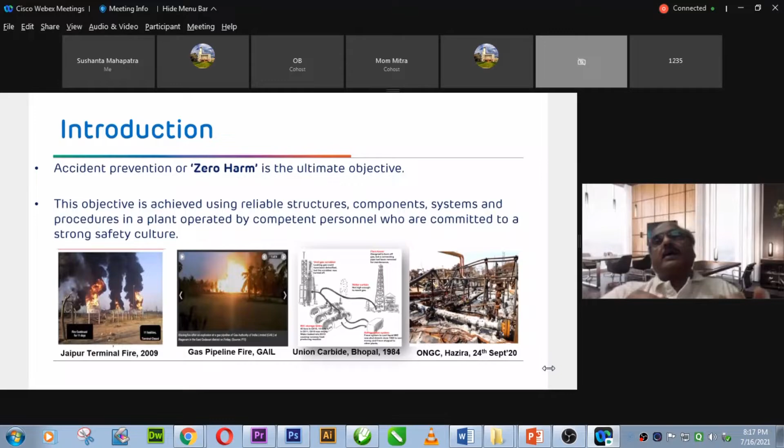Many of these, their sustainability process requires identification and monitoring of critical safety performance indicators, or operational indicators, because this helps management know the current status of operational integrity, and also prevent catastrophic failure and loss of control. Ultimately, the idea is how do we achieve zero harm, or avoid any major loss of control. There are many enablers, but fundamentally you need to have a reliable structure, components, competent people, processes, systems, which are run by competent persons.

There are numerous industry examples which have shown that if these performance indicators fail to be recognized, fail to be understood, and fail to be acted upon, it can lead to catastrophic disaster. The examples are numerous - the Jaipur terminal fire, the gas pipeline fire for Gas Authority of India Limited in 2014 in Andhra Pradesh, where 22 people got killed. Even everybody knows about Bhopal. In fact, very recently, I know about this ONGC Hazira gas plant, where suddenly in the morning at 3 o'clock on 24th September, there was a huge blast and fire. Fortunately, nobody got killed.

But if you look into the details of the failed mechanism, or how it came out, they started coming out with fire and explosions. So these are something which teaches us and the industries that the moment you fail to recognize and take necessary action onto those deviations, it is going to not only kill the people, it is going to derail the entire plant. It is on the survival of the industry how they understand those performance indicators and what kind of seriousness they have on taking action.

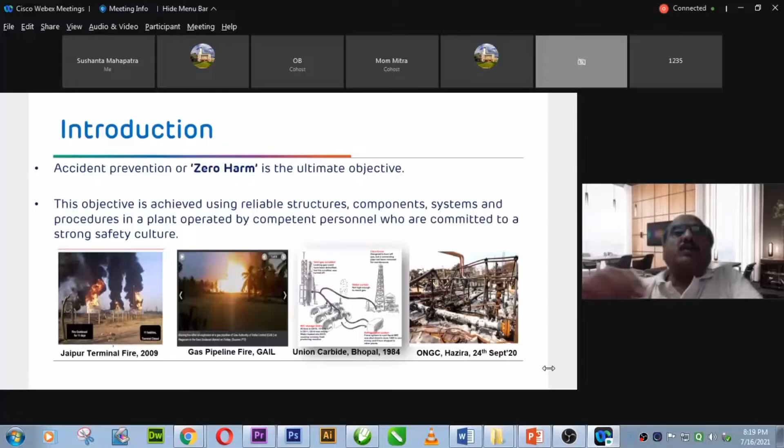When we talk about process industry, whether it is continuous process or batch processing, those processes have the kind of hazardous chemicals or materials getting handled. This is applicable for both.

I'll tell you, in the organization where I'm working, we have many batch processes. But the kind of performance indicators we have fixed, and the way it is monitored and acted upon, the kind of automation we have done, it does not matter whether this process is continuous or batch. The kind of seriousness is all the time the same. In fact, those in batching processes are more exposed, because you do not know what has happened in between when the second batch or third batch is coming up, what kind of conformity in the raw materials and process parameters are there. So I see more danger in terms of batching process industries.

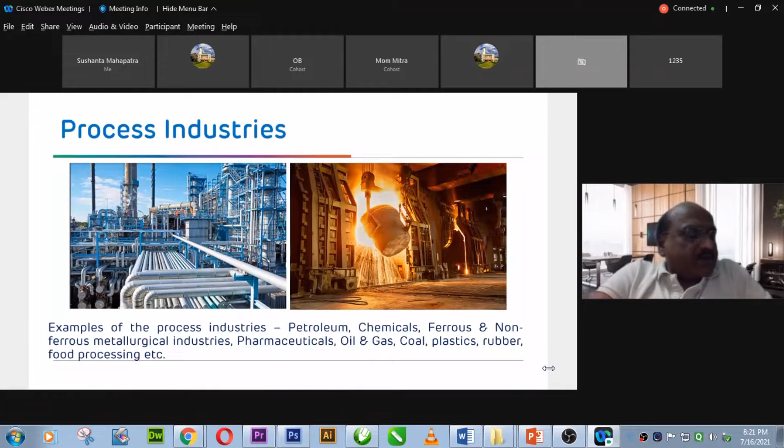There are a lot of examples, like petroleum, chemical, ferrous, non-ferrous. Every industry has its own issues, its own way of monitoring. But the idea is how do you really look into those parameters. That is the topic of discussion today. And then we go back and see. Particularly, I will tell you how I depict the entire process.

If you look into this particular box, all the industry will have three systems. The first is the primary system. If you look into the primary system, generally these are the systems which are operated by or controlled by the operator. And the primary system will have measured input and measured output.

In between, you have raw material, technology, equipment, and all, and the output is the value-added product, whatever the process intends to take out. In between, you have assets. So how are the assets designed? How are the assets managed? These are actually not the responsibility of the primary system guy, the operators. So the primary system looks into how the secondary system provides that infrastructure and the maintenance practices.

So it will have, as you see in the diagram, a process control system, alarms and interlocks, safety instrumented system, physical and community safety procedures, the people involved in those, their competencies, and the auxiliary output can be the accident, loss of control, loss of containment, quality defects, health issues, pollution, or adverse impact on the community.

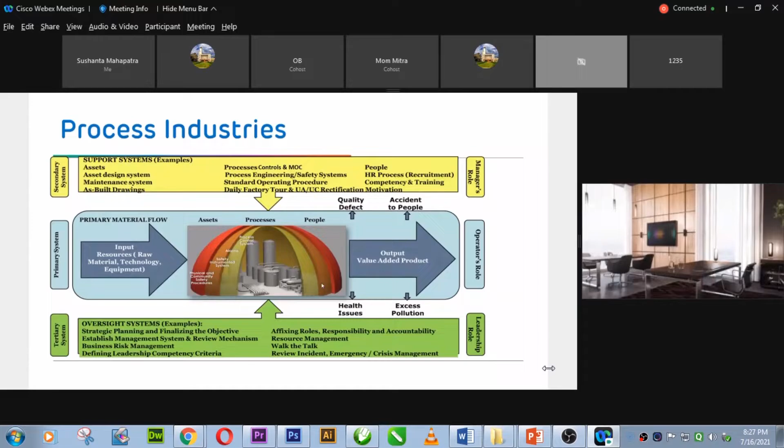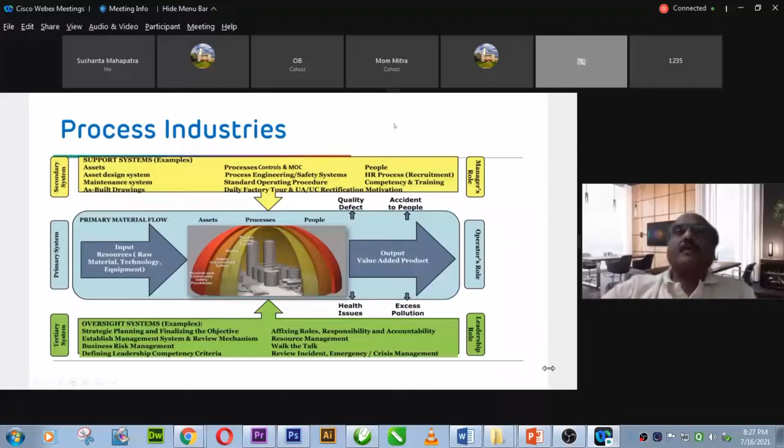It is more about the sustainability of the businesses and processes. So when we talk in terms of process industries, I see there are 6 dimensions of safety in process industries: safety management systems, safety instrumented systems, aging plants, overfill protections and containment systems, competencies, and emergency planning.

Failure of compliance to any of these dimensions results in very high consequences, sometimes catastrophic, impacting human lives, environment, property, and communities. These dimensions are translated into safety performance indicators for identifying early warnings of process incidents. I'm going to describe each one of these dimensions separately.

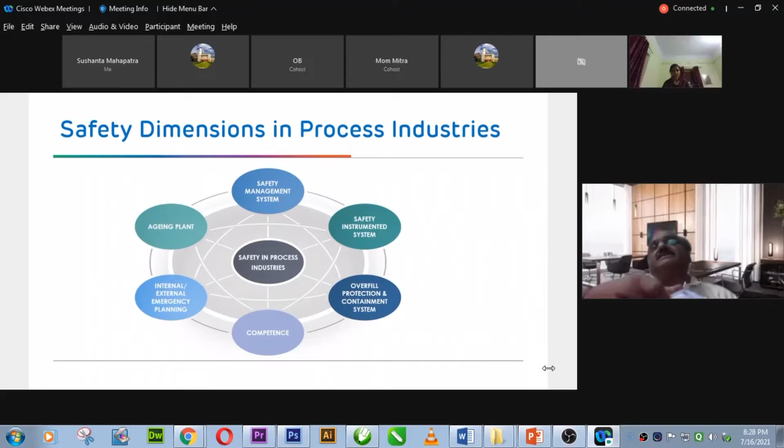For example, when you look into aging plants, there are industries that have not modified themselves, and have not corrected their plant, machinery, and technology to meet current requirements, and they are in trouble. If you know, Tata Steel was established in 1907, and I don't think there is even a single plant, except Blast Furnace A, which is continuing from then.

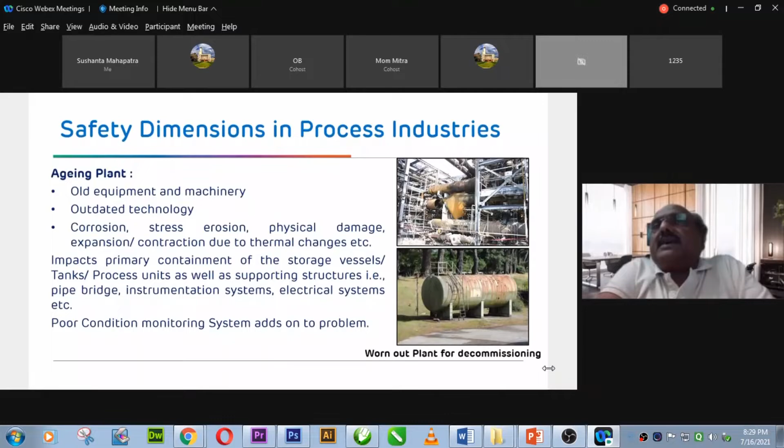So at every plant, they know the life of those plants, and they replace them. They have continuous planning for modernizing those plants. So those organizations which have aging plants need to look into whether, because with old equipment, machinery, and outdated technology, you have a bigger risk.

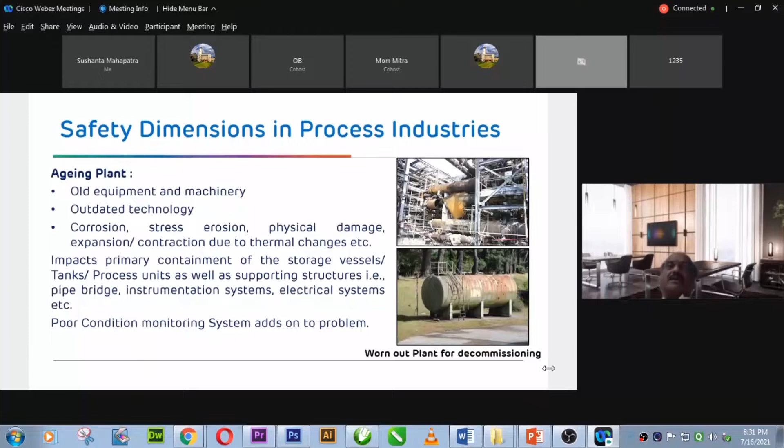So how are organizations taking those considerations in putting processes better in operational excellence, while also ensuring that safety, occupational related health, and the community are taken care of? Many times, even with aging plants, management is eager to continue. How are condition monitors happening across? So this is one of the important dimensions of how management looks into aging's critical parameters and what their planning is for working on those.

Second is about safety management system. I think everybody knows about the requirement of safety management systems. For me, management of change is one of the important parameters which many times people do not understand. And I think there are many incidents in industries which have always focused on the necessity of integrity of management of change.

In fact, initially when I was talking about the Surat ONGC Hazira plant explosion, that was one of the failures of management of change, because when they put the O-ring in one of the flow meters, it was a locally made O-ring and they thought it will work, but it failed, and that was a huge exposure which caused those issues.

I have experienced another incident in one of my organizations when there was a chlorine pipeline problem. They asked the contractor to change the pipeline, and I think it was 1st of October 2015. The 2nd of October was a holiday, so everybody was in a hurry to finish and hand over the plant to the operator. In that hurry, they took out the pipe and also changed the O-ring.

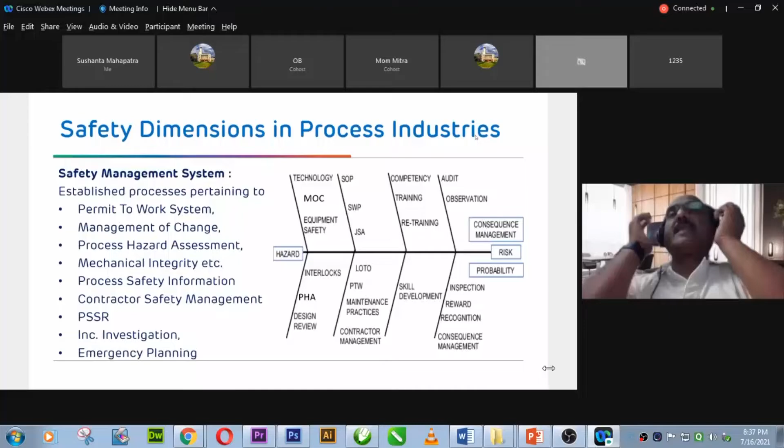A lot of messages are coming saying the audio is unclear, so we are feeling some disturbance. Is it possible to use headphones? Let me try to solve the problem. When I wasn't using a headphone, people used to complain; now that I've started using one, is my voice clear? Yes sir, your voice is clear now, very clear. Let me check if it's possible - is it okay? Looks okay, go on, better sir, better. You don't have a mic on your headphone? So it has a mic there. Hopefully this is better now.

So I was talking about those parameters under the safety management systems. Contractor safety is another part of the entire process, along with PSSR. These are very common, important dimensions in the process industries.

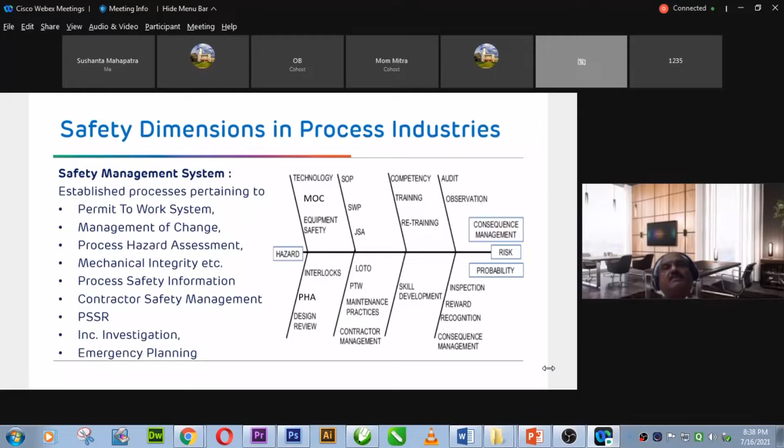I'm moving to the next part, which is emergency planning. Particularly in the process industries, this topic is very important - how do we develop an internal emergency plan covering all potential emergencies within the site, how do we simulate those emergency scenarios and ensure their effectiveness through models, and how do we update and validate the emergency plans?

There are many good examples where organizations were successful in managing emergencies within their own area and resources. However, when we talk about external emergency planning, how does the organization develop plans with neighboring industries and local authorities, covering all potential emergencies within the area, and simulate those to ensure their effectiveness is checked through the model?

If you look into the details of industrial scenarios, there are many examples. Bhopal was one where people were unaware of what would happen if something leaked from the plant. There are many ammonia leakages in industries, and recently we had the LG Polymers gas leak where styrene leaked. Nobody actually knew what could go wrong if something escaped. So it is very important how industries make the surrounding community knowledgeable and aware of what can go wrong and what their access would be if something goes wrong.

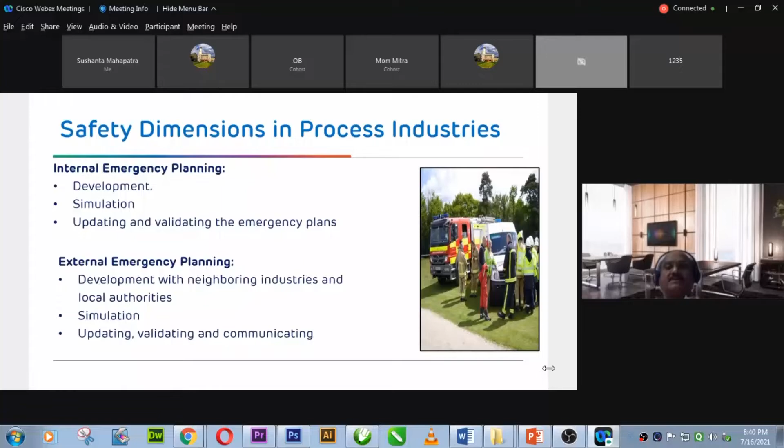This is another very critical part of the safety dimension in process industries, which as an organization we need to look into.

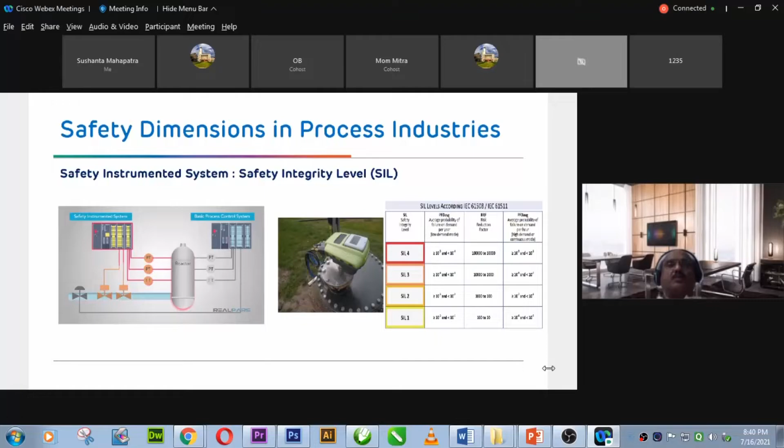The safety instrumented system is very critical internally in terms of reliability of the entire instrumentation systems. Safety instrumentation systems are used to monitor the condition of values and parameters of the process plant within operational limits. It's also about how effective those interlocks are, depending upon the risk involved. The management has built in safety integrity level instrumentation, because SIL 1 is the cheapest and SIL 4 is the most precise kind of system in place.

How serious is management about the kind of money involved in putting in the SIL level? I have personally seen that organizations highly oriented towards the risk involved in their processes, and how it could take away the entire operational part, or how important it is to ensure sustainability of the processes, put money into it. But how, as engineers, are these identified as critical process risks? People don't want to spend extra money on this unless they understand the consequences and how it's going to impact the entire operations.

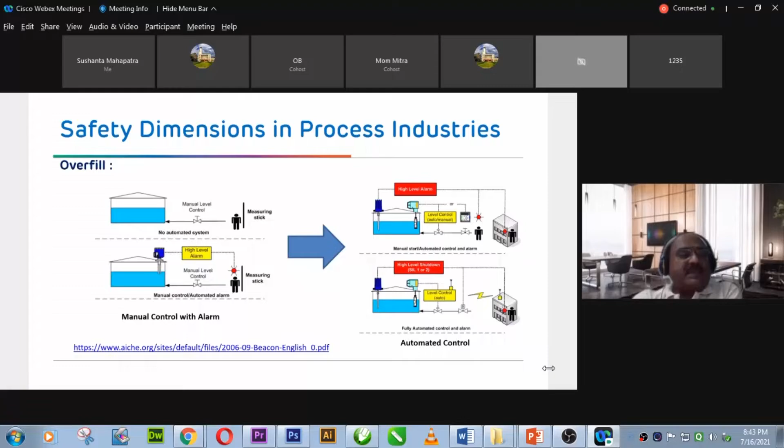This is another important dimension in the process industry: how overfill is critically monitored. The most common process safety events are linked to overfill, which has a very high potential for fire, explosions, and environmental release, and these are very common, with a lot of deviations. In fact, in Texas, and Indian Oil, there are many examples in India also, where overfill has initiated process deviations, followed by an ignition source, and then the entire thing has gone up.

So when we talk about overfill, there are different mechanisms. How do we, as management, provide automation control for that? For example, here there was a manual level controller - people were supposed to go check what the level is, come back, and then close the valve. Then they started with some manual and some automation control.

Looking back, many industries are going for automated control so that it's not dependent on people. However, what kind of redundancy are we providing in these systems, so that even if one sensor fails, other systems are able to take care of that? This is one part the organization has to work upon.

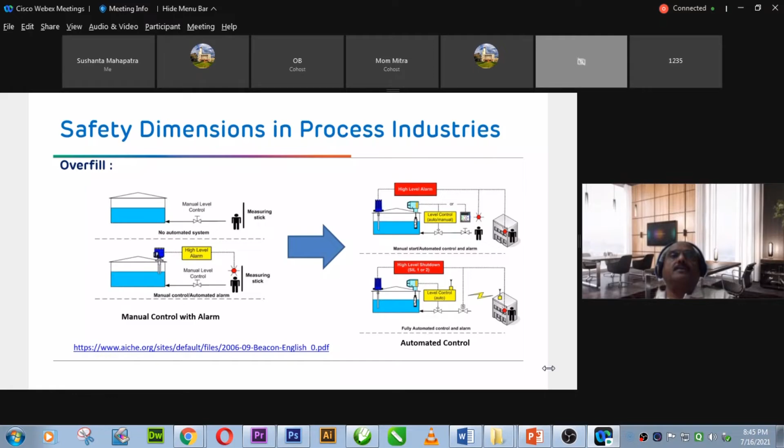The next topic is about the containment system. Loss of containment is another reason for many process industry incidents. Generally, when we have a bund, it would catch any loss of containment from primary containment, say steel tanks, with concrete jackets surrounding them. Many times, if these are not meeting requirements or not capable enough to contain those cases, during emergencies it goes beyond and can impact the society and surroundings.

There are already regulatory provisions stating it should be 110% of the capacity of the largest tank, or 25% of the total capacity of all tanks within the bund. But particularly in my experience, bunds are only made to show the statutory authority, but most of the time bunds don't have the capability to hold the entire loss of containment of the particular chemicals or materials.

If you go back into the industry, there are statutory requirements for tertiary containment lagoons. Nowadays the legal requirements are also there to ensure you have tertiary containment lagoons available so that it does not go into public places. At the same time, those tertiary containments should have impermeable membranes so that it does not penetrate into the ground.

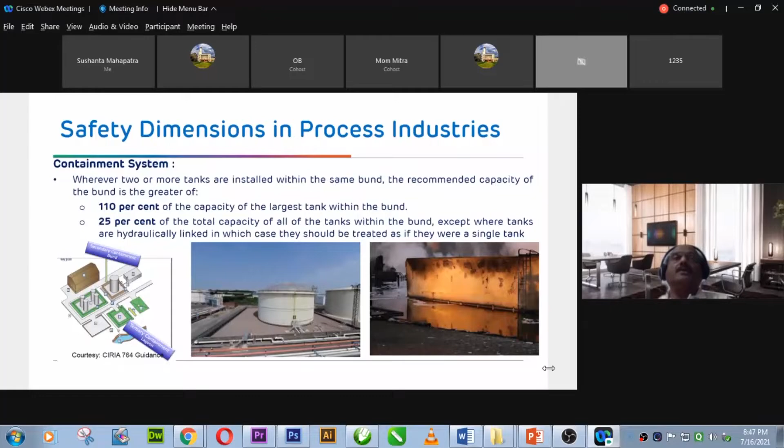The other important factor, as I said initially, is how you have your competency driven process in place so that people have the knowledge and the ability to convert that knowledge into practice. We have worked upon different levels of competency depending upon the hierarchy of the organization.

When we talk about chemicals and other processes, we have many batch processes in place. So we have put competency assessment in the functional area of competencies, defined as level 1, level 2, level 3. In each of those, we have defined the level of understanding required regarding chemical reactions, compatibility of chemicals, the material safety data sheet of the hazardous chemical, the process equipment, what deviations mean for the processes in place, and how they would react to those deviations if they are able to identify them.

I think one good example on this process equipment deviation is the Bhopal tragedy. All of you know about the Bhopal tragedy, what happened and how it happened. But I remember the video from the Chemical Safety Board, when it started, and the chief supervisor was monitoring the pressure into those MIC tanks.

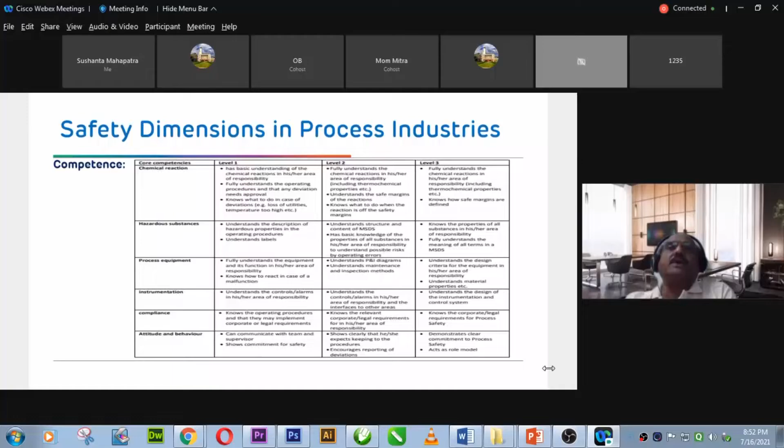Similarly, about instrumentation - their understanding at different levels, compliance, knowing the operating procedures, what are the critical parameters on which they have to take action when it is going beyond the highest or lower than the lowest. Similarly, people's attitude and behavior regarding those deviations. This is one of the important parameters of the safety dimension in process industries.

Now I'm going to talk about the actual measurement process.

About this active monitoring or reactive monitoring, we say leading indicator, lagging indicator. Both the monitoring systems provide you the structured manner for risk control, the barriers, layers of protection within the whole systems. In tandem, or separately, they act as system guardians, providing dual assurance to confirm that the risk control system is operating as intended.

Or providing a warning that problems have started to develop. Generally, when we talk about active monitoring and reactive monitoring, or leading and lagging indicators, one example is the PRV or PSV. Completion of testing of a PSV, the pressure relief valve, can be said to be a leading indicator. And the number of times the PRV failed to lift the set pressure during testing can be a lagging indicator in process safety terms.

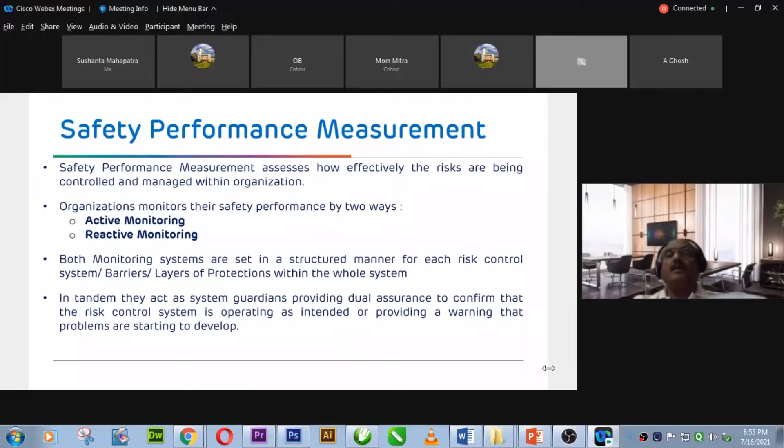So both of these are having their own significance. The lagging indicators are based on incidents and their losses, retrospective and reactive metrics. The leading indicators are based on the performance of key processes, layers of protection, operating discipline. This is forward-looking, proactive metrics, and helps you prevent things from becoming lagging indicators. It must be linked to the safety dimensions and identified barriers, layers of protection for prevention and mitigation of incidents.

If you look into the barriers or layers of protection, we can have physical system barriers, instrumented systems, management systems, and can be linked to plant design and age, as we discussed. Staff competency, we have also discussed about that. Operational procedures - whether it is adequate, whether all the necessary parameters have been described in it, whether people have been trained on any changes, permit to work, MOC, instrumentation and alarms, plant change control, inspection and maintenance. These are some of the critical parts of processes linked to those layers of protection.

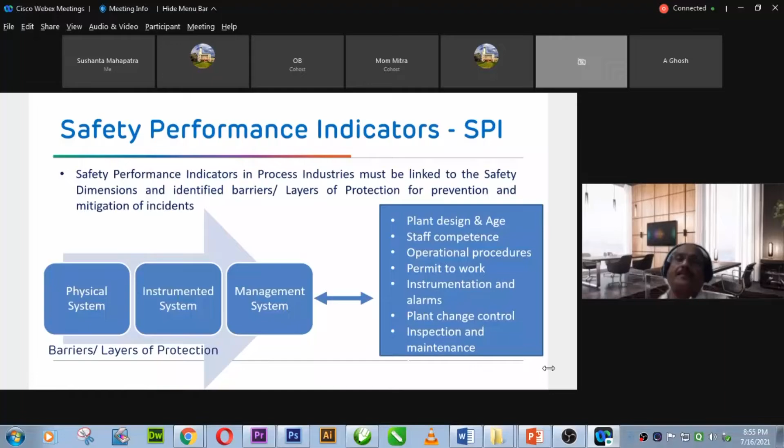We talk about how leading and lagging indicators provide dual assurance. If you see the reactive monitoring, these are the consequence indicators, but they're linked to the risk control system, or RCS, of barriers or layers of protection. So the entire efficiency is how we work upon the leading indicators or active indicators, which provide the important actions to be taken on those deviations necessary to deliver the desired safety outcomes.

So how do we act upon the advanced findings on those leading indicators and try to prevent them from also becoming reactive parameters of the processes. However, continuous monitoring of both the reactive as well as proactive monitoring systems helps provide dual assurance that the system is working as desired on the particular risk control systems.

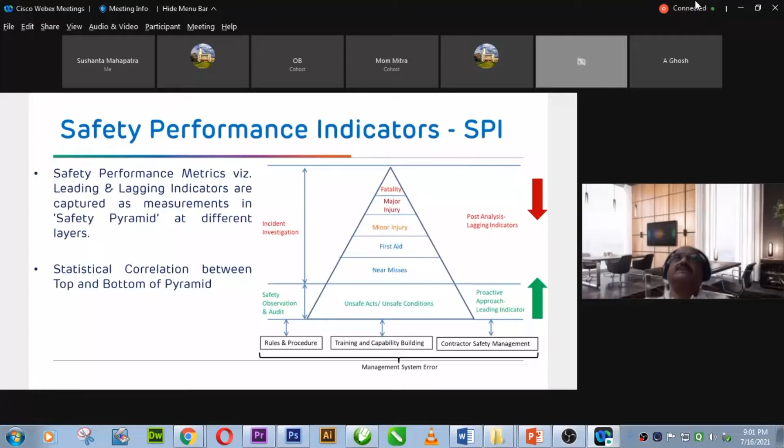Because nowadays contractors play a very important role in managing the process, because almost 30%, 40% of frontline operations are done by contractors. So how does the organization manage contractor efficiency in terms of their resources, knowledge, competency, and skill? But when you go back to the process side of things, it's slightly different from the behavioral part, and how are those process safety incidents recorded?

The process safety events are recorded. Near misses are recorded. Critical process deviations are recorded, monitored, and acted upon. So if we work on those process incidents, process deviations, day-to-day, shift-wise, and take a good trend to understand what deviations are happening. And many times, if an organization or even management does not try to establish that kind of seriousness in the normal way of process deviation, it becomes a huge problem later on. So people's sensitivity towards day-to-day process deviations must be taken care of. That is one of the important process indicators, how serious people are about those deviations.

I will tell you about one of my site visits. I went to one of the control rooms and was talking to the person who was controlling things there with two, three other people. I was looking into the control panel. There were some, as you know, when you go to a control room, there are green lights, red lights, yellow lights, white lights. So I asked the guy, this corner, three lights are continuously yellow, what does it mean? And the guy said, boss, I don't know, because since I joined five years ago, this has been continuous yellow.

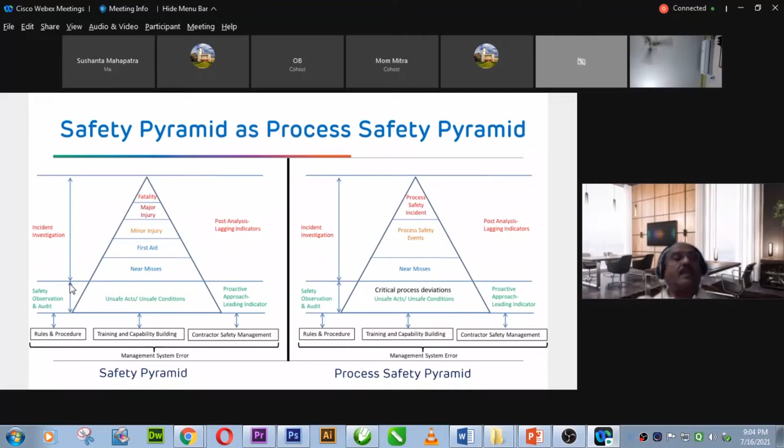The other important thing is to understand what those layers of protection are, how effective they are, whether those layer of protection barriers are independent and clearly identified and referred to, to understand how those layers of protection are helping the entire process. So when we look into the barriers, they must be independent.

When you talk about closed systems, they are designed to physically cope up with the operating pressure. When you talk about instrumented systems, they are designed to control the pressure within the design limit, or the temperature, or the flow. Additional physical systems are installed to relieve the pressure if the logical system fails to control it. Inspection and maintenance systems are designed to ensure integrity of the physical systems. Management systems like procedure, competency, performance management, and audits are designed to ensure that all of the other systems work effectively. So how do the layers of protection do their work independently?

This is another very important performance indicator for the industries.

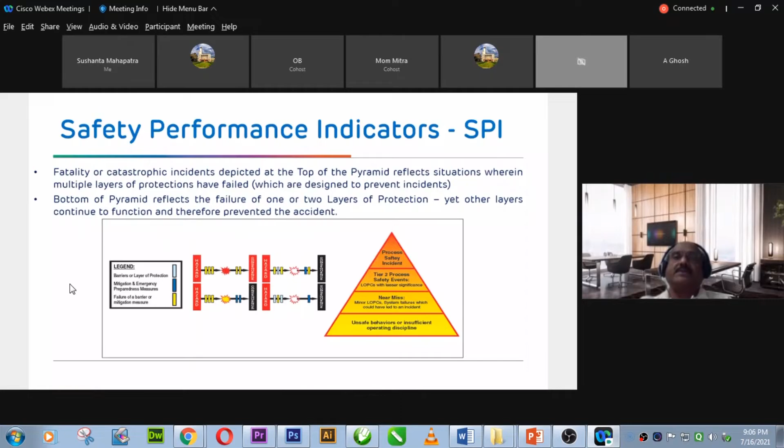If you look into the details of the potential incidents and how they are correlated or related, critical performance indicators are there. Like loss of containment, fire explosion, environmental release, process units, and all. These are permits related to these incidents that can be linked to those PTW variations.

How do we work upon those, like field audit, document audit, permit verifications, non-compliance, critical activity decategorizations on the permit to work. Similarly, audit will help you to understand how we can help prevent those kinds of incidents.

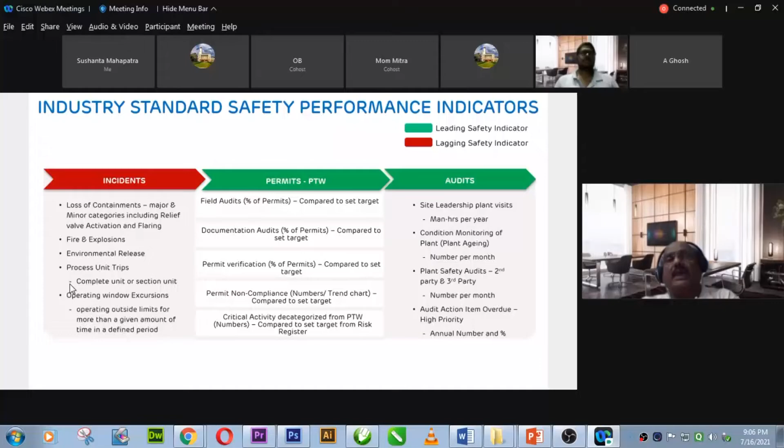Similarly, emergency response will help you if we do the inspections and do those models. It will help to get ready for those emergency responses. When we talk about...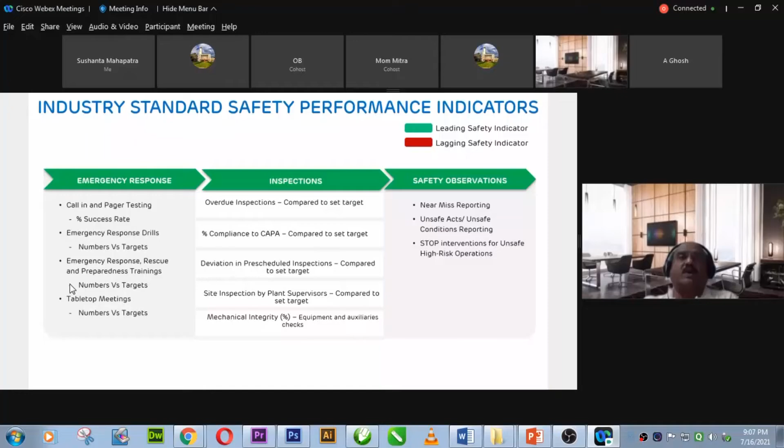Process safety management, how the MOC is working upon, like number of open or overdue MOCs, number of incidents due to failure of MOC, number of MOCs raised by non-trained employees, compliance to the PHA. So those process safety parameters help you link to those lagging parameters. And safety instrumented system talks about overdue test failure, bypassing or overriding safety instrumented systems.

Similarly, another set of parameters relates to routine operations, what are the daily shift checks, the start-up and shutdown checks, housekeeping audits, industrial hygiene. These are critical safety performance indicators which help you control effectively on process and operational efficiency.

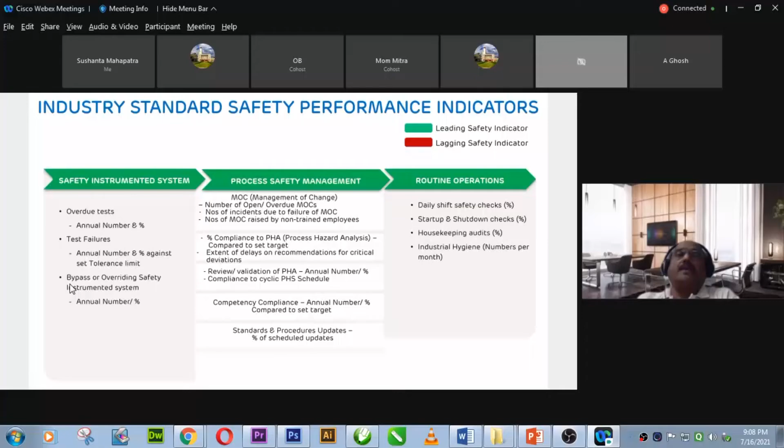I'll just present you a very simple case study on the process industries. This is related to one of our businesses because we are India's largest port. This company operates a contract bulk storage business handling at one of the port sites, comprising two separate tank farms, each containing 80 bulk liquid tanks.

Chemicals are imported by ship and discharged at a jetty on a canal. Shore side offloading is undertaken by company personnel, and the chemical is then transferred to the site via fixed pipelines running across a private field and a small public road. Both sides have road tanker loading gantries. Ship to shore transfer is undertaken via articulated gantries with flexible hose connections and screw fitting couplings.

Road tanker filling is fixed on the overhead gantries with some bottom loading using flexible lines. Clients' contract drivers fill their own vehicles. Both sides are in operation 24 hours a day. All lines between the source and the installations are cleaned and pigged regularly, and bulk tanks often must be emptied and cleaned to allow for a change of product.

Because these are all very dynamic in nature - today one vessel has come with hydrochloric acid, tomorrow there may be nitric acid, then it can be LPG or LNG. Anything can happen any day because we're not very sure what vessel will come tomorrow or which vessel will reach at what time.

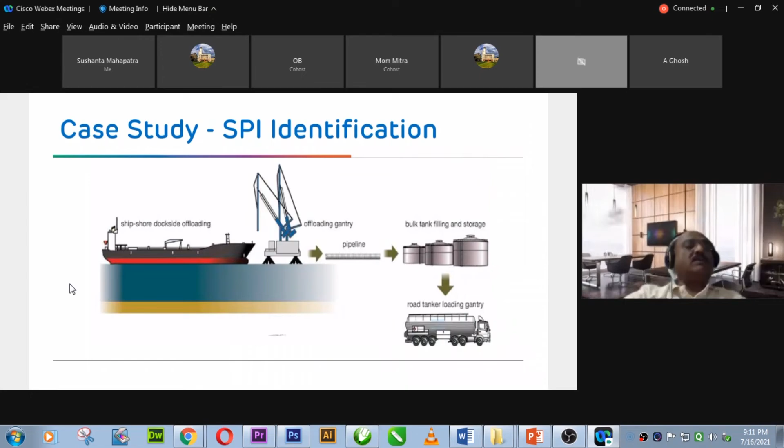Now on this particular process, how do we set the SPI? I described the step process in slide number 20. I'll just focus on steps 2, 3, and 4, the clear steps, and we will discuss it.

In step 2, decide the scope of the measurement system, the storage tank will be looking into loss of liquid into bund, loss of liquid outside bund, fire and explosion, fire in bund, fire outside bund. When we look into the dock line and chemical transfer to storage tank: loss of liquid from the dock line, loss of liquid from the fixed pipeline, coupling, valve, and flanges, fire at the dock side, and leak in the transfer pipeline, fire in bund, fire outside bund.

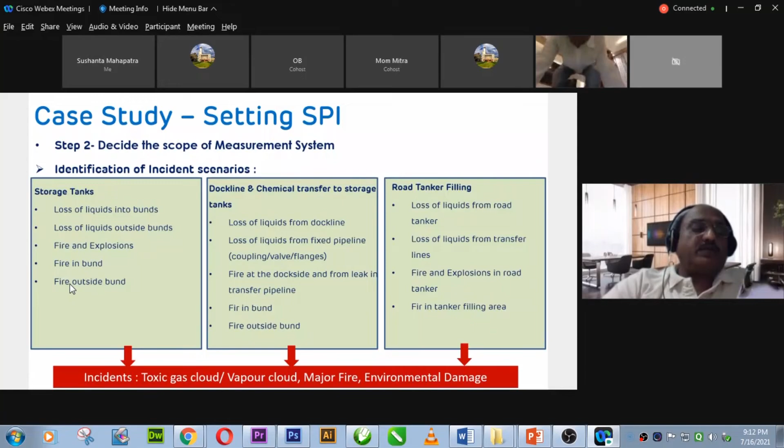When we talk about the road tanker filling: loss of liquid from the road tanker, loss of liquid from the transfer line, fire and explosion in the road tanker, fire in the tanker filling area.

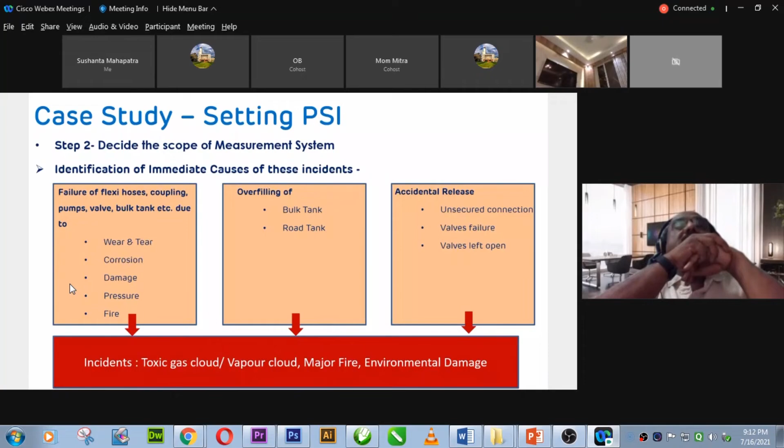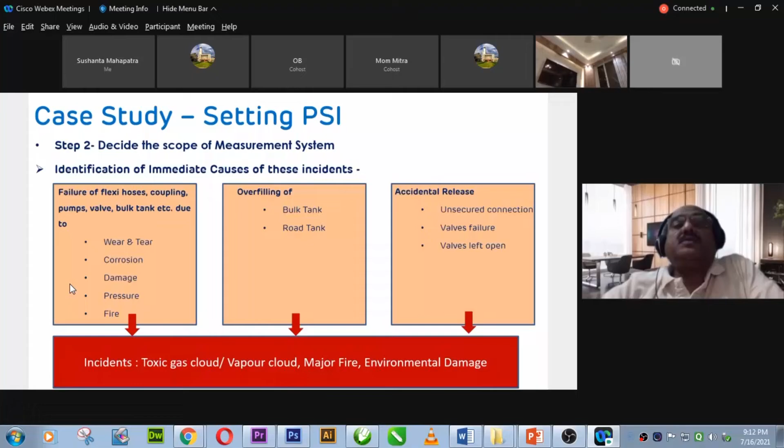Similarly, the immediate cause of these incidents can be failure of flexi hoses, couplings, pumps, valves, tankage, which can be because of wear and tear, corrosion, damage, pressure, fire, overfilling of bulk tank and road tank, accidental release because of unsecured connections, valve failure, or valve left open. So these are the deviations or parameters which can lead to the bottom of the barrel.

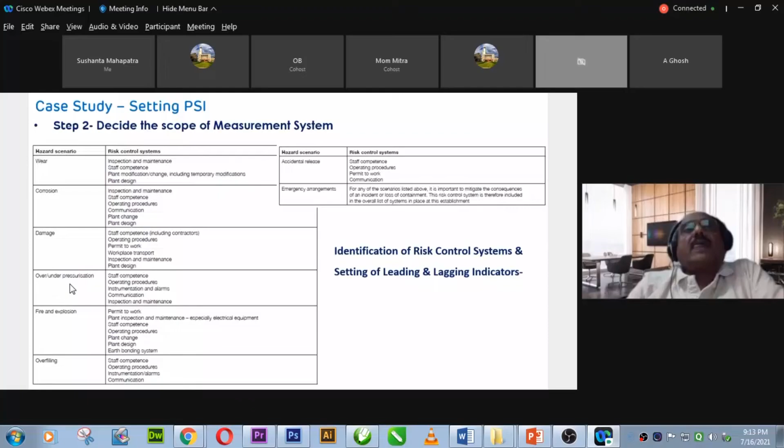Decide the scope of the measurement system, we decide on things like wear - what are the risk control systems, corrosion - what are the risk control systems, damage - what are the risk control systems, over/under pressurization, fire and explosion, overfilling, accidental release, emergency arrangements. So we work on deciding the scope of the measurement, as we talked about the 6-step process, and then identifying the risk control system in place to prevent accidents.

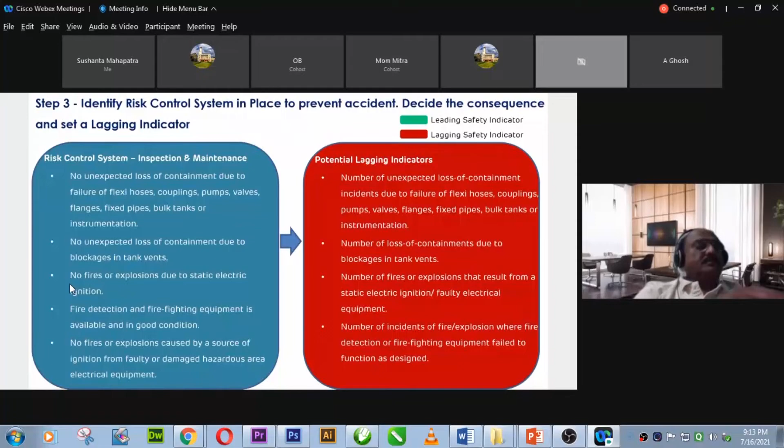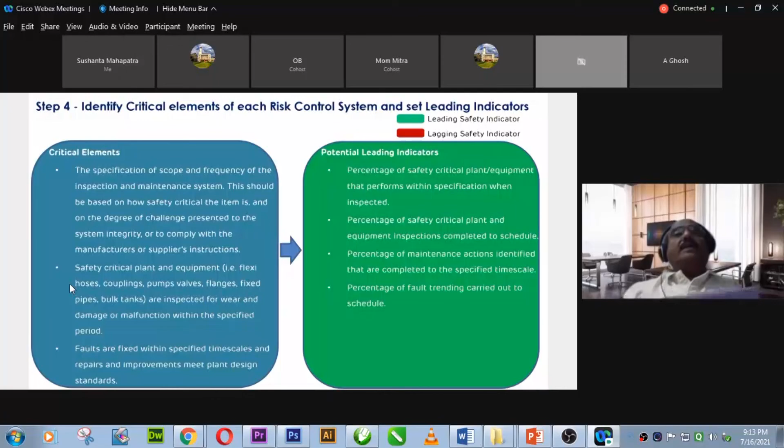So what are the potential lagging indicators? We take those risk control systems and identify what would be their potential lagging indicators. Similarly, we take out those critical elements - what are the critical elements and what are the potential leading indicators into that. And then we ultimately come to see how this dual assurance works.

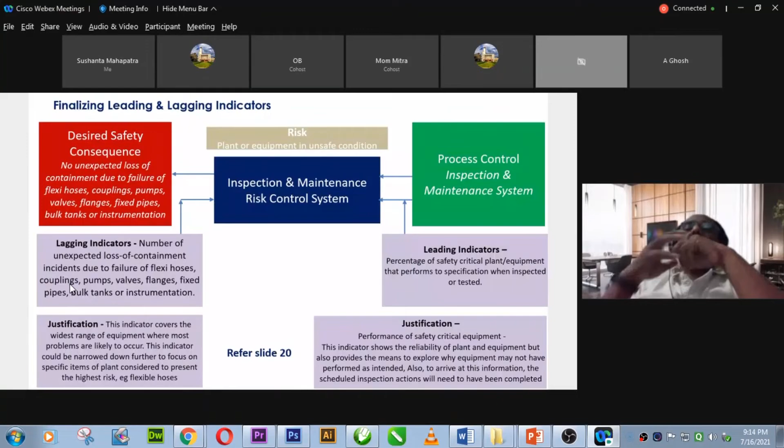Whatever we have decided in terms of leading indicators for all those deviations, and what would be the potential lagging indicators, and then justifications in terms of performance of critical equipment, and similarly for the lagging indicators. So this is how, as a simple case study, or in the entire process, we work on those performance indicators or SPIs.

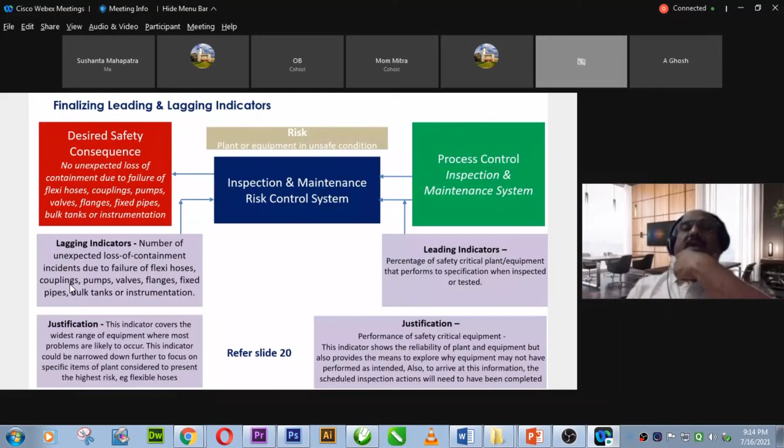Thank you, sir. The session was very informative, and I believe participants have benefited. So, sir, from the chat box, we have received more than 10 questions, but due to time constraint, we are taking only 3 or 4 questions. The first question is, how are safety performance indicators evaluated?

Yes, sir. As we said about one of the example case studies, once you decide on the different parameters based on the potential deviations in the processes, those are the routine checkups. For example, I can tell you about the hose type, the cleanliness with the particular tank, what kind of washing has been done, how do we verify that - because as I said, you do not know which chemicals will be put tomorrow after picking a particular tank. So these are regular indicators which are monitored, and deviations are worked upon on a case to case basis. Maybe every morning in the meeting it is discussed. The critical deviations are taken up as the case may be, on an immediate basis.